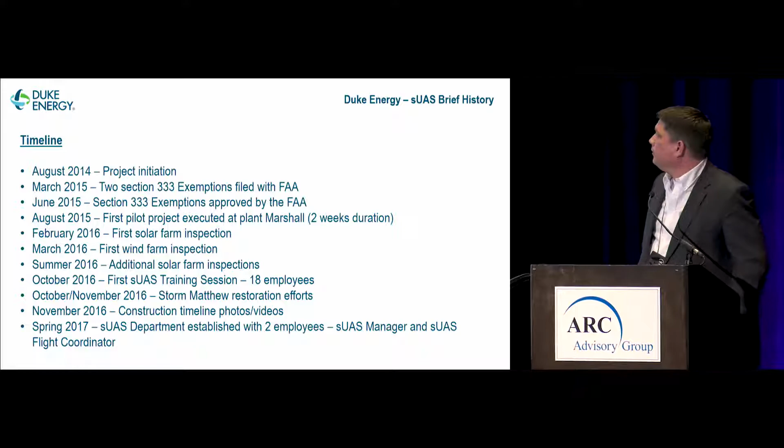So we started working in August 2014. We received our first two Section 333 exemptions in March of 2015, June of 2015, and we did our first pilot about 2 weeks later at a coal plant. Coal plants are great, or any kind of generation facility is great, because you usually have generation equipment, you have transmission equipment, some distribution, and in our case, we actually had renewable. We had a solar farm there also. And so we did the steps through. We ended up doing a wind farm.

And then in October of 2016, we went through our small unmanned aerial systems training. After Part 107 came out, we actually decided to train our own internal employees to this. We'd been hiring it out to outside companies. And what we found was that our own internal employees really wanted to be able to do this themselves and have the platform to be able to go, as Kurt said, at a moment's notice and do what needs to be done. We did our first storm restoration in October, November of 2016 with Hurricane Matthew.

And then we actually have created a new department at Duke. So my group is the Emerging Technology Group. We take these technologies and evaluate and pilot them, and then we roll them out to a business unit. In this case, unmanned aerial systems were wanted by all the business units: generation, distribution, transmission, commercial renewables. And so the best place for us to put them was under our aviation department. So our aviation department created two new positions, and they hired a manager and a flight coordinator to be able to do all of our UAS flights.

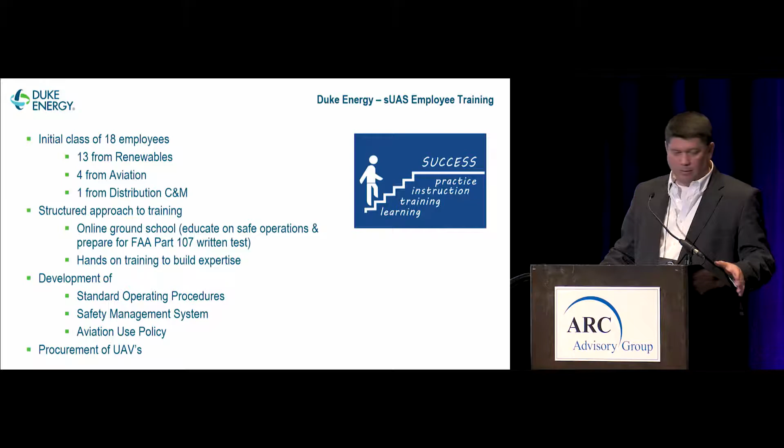The new manager of UAS as well as the coordinator have built a really good program around these unmanned aerial systems for Duke. They've created standard operating procedures, a safety management system, the aviation use policy. So even though we have our own pilots and our own platforms, we still have contracts with third-party vendors. And those contracts have to be vetted through our risk department. So they've put together all these different contracts as well as procurement language when we go out to buy UAVs. I want to really give a great shout out to those two guys who've been working themselves to death.

The ground school, again, we teamed up with the Unmanned Safety Institute and went with an online self-paced training through multiple different factors, airworthiness, human factors, and then of course you've got to know the rules, especially what's going on with Part 107. And then for the in-field training, we went out and actually let them fly the different platforms that we use.

On the right hand picture, if you could start a video just while I talk.

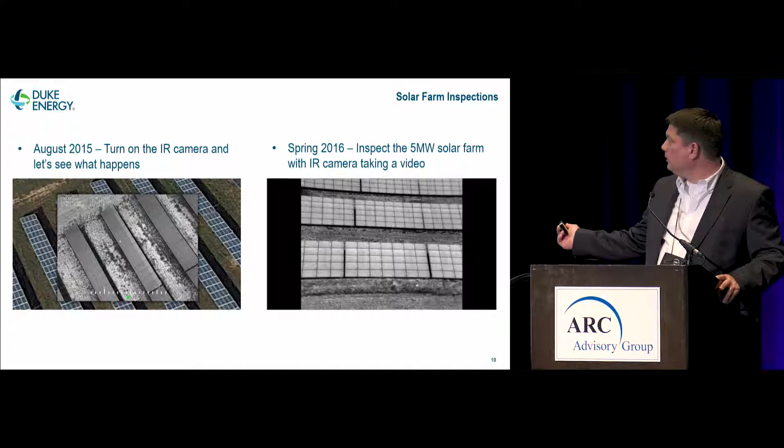So what really turned us to think about these as more of an operational tool is the fact that, we're in 6 different states, but North Carolina is the second fastest solar growth state in the United States.

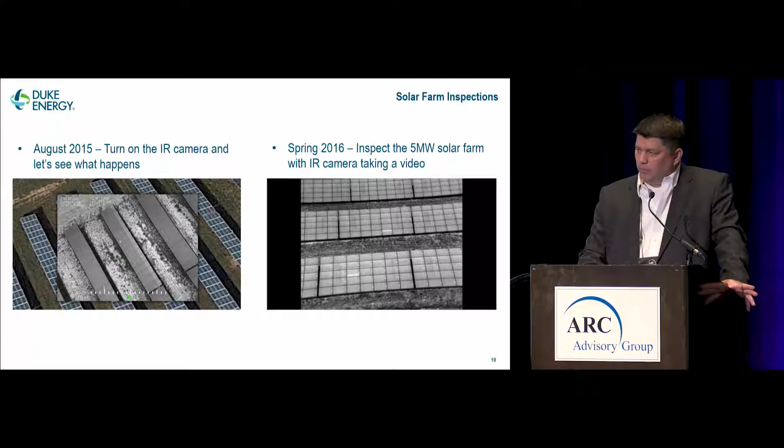And so we are looking at and managing a tremendous amount of solar. And in the past, what we've been doing to inspect is we'd be walking 5 megawatt solar fields and going and looking at thousands of panels and connections and seeing if we could find problems there, checking voltages every so often. Well, what we found was as soon as you put an infrared camera on a drone, what used to take 3 days takes about 2 hours.

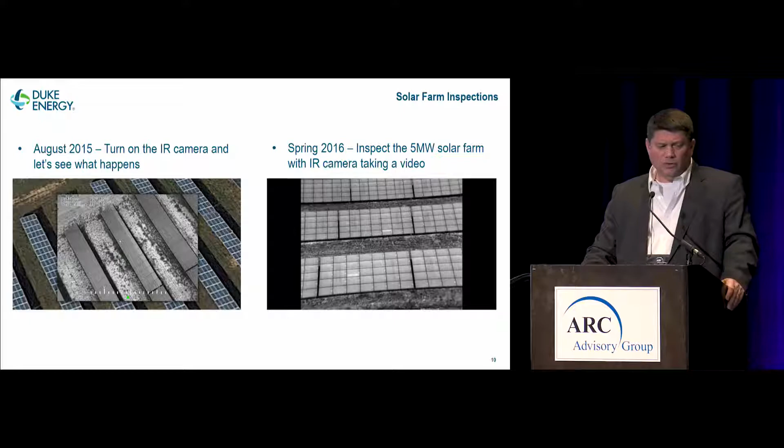So there's operational efficiency there. There's also a safety aspect there because now you don't have people walking around with overhead objects like solar panels that they could potentially hit their heads on, or slips, trips, and falls. So we really started in the spring of 2016 looking at using IR to do a lot of these inspections.

This makes a big difference when you go to farms that are 32 megawatts, 85 megawatts, hundreds of thousands of panels, and the time it would take you to go out and actually walk this. So we're seeing a tremendous operational impact from being able to do this with this type of drone UAS technology.

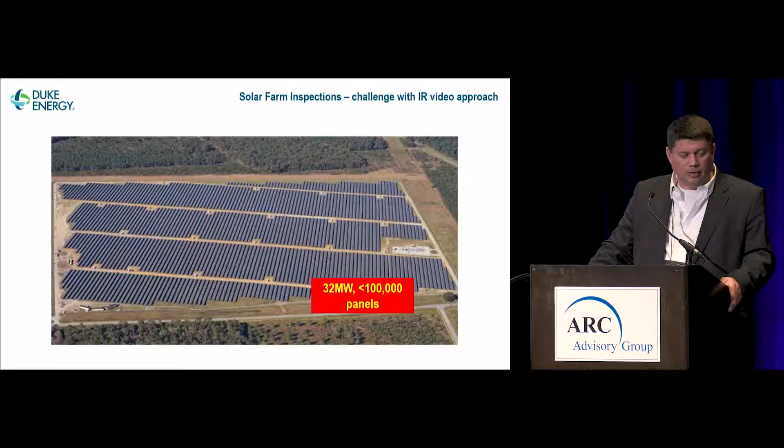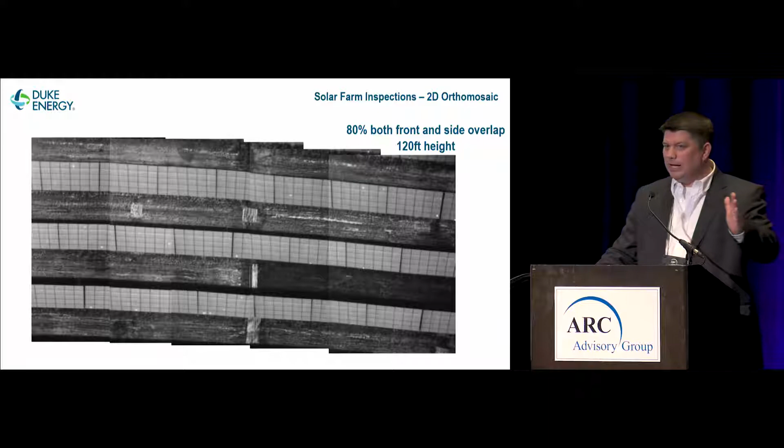One of the challenges that you run into, though, is once you start mapping areas as big as that, you're going to find that in 2D orthomosaic, you're going to get lost, because if you're taking video, that's one thing, but if you're taking individual still pictures, you've got to piece them together. And there is no kind of bottom XY plot to really say this is where you are. And so we're having to do 80% overlap on both the front and the side at about 120-foot height to really understand where I'm at in that solar field as I move along.

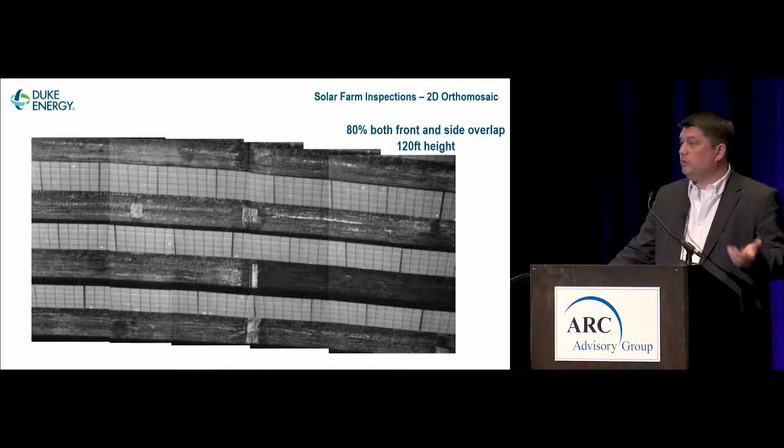And I didn't point this out on the video or in this picture, but you can see failed cells by the light color. They look white. So if you see white patches, those are hot patches, all right? So they're not actually generating any electricity. So you could see whether it may be a cell, whether it may be a string, or you could have an entire section out where you might have to go look and see if the inverter's even online.

We use a really good mapping program called Pix4D, and it is great, and I don't know if you can see it, but that is a complete string that's out. And then you have a couple of cells that are out over here. But again, it's really the mapping of the video that's been taken and getting it into a program that you can actually make sense out of the video and make work orders at the end to go fix those issues.

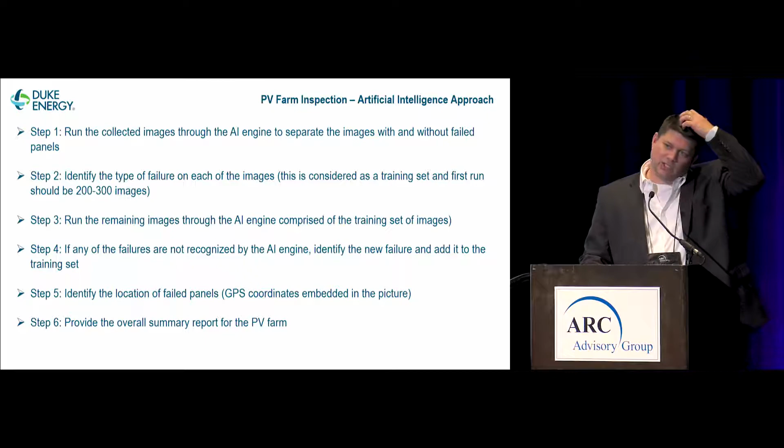So where we're headed, though, is doing it with artificial intelligence. So there's some new AI chips being made by Intel and others that are going on these types of platforms. And what we're really wanting to do is go through these different steps. As you go through, you collect the images, and then you want to see some that have failed and some good panels. You're going to identify those types of panels, and then you're going to run it again. And it's somewhere between 200 and 300 images to train the platform on what it's looking for.

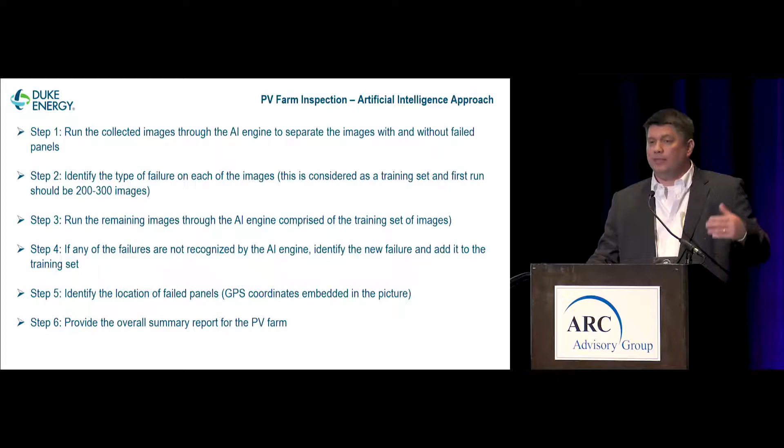And then you actually run it. You put the platform up in the air, and you go through and see if you can identify it. And then any failures that are not recognized become a new add to the training set. And so we're starting to work on that now with this program, and these 2 pictures are nothing more than our first attempts to start using a little bit of artificial intelligence to tell us where it thinks failed panels are. So we're not there yet.

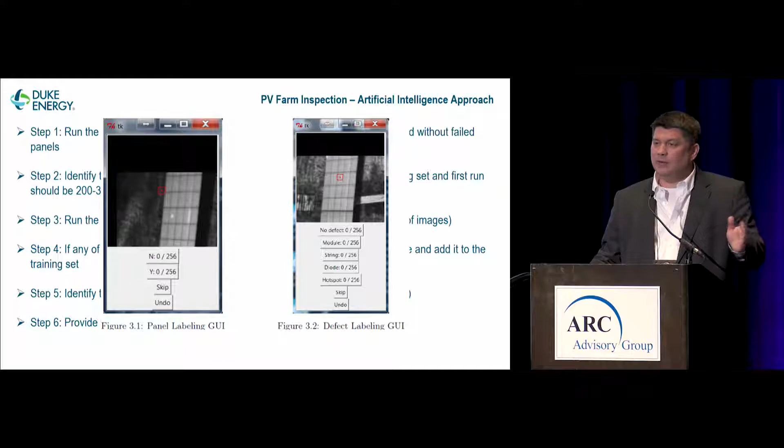This is not a commercialized, proven commodity for us, but it is where we want to go because we spend a tremendous amount of time looking at video. It's still a lot less time than we did when we were patrolling and inspecting by hand or by foot. But if we can make this work with the artificial intelligence to actually see where this is failing, recognize it, and create the work order, it's going to be a lot better for us as we go forward.

So wind turbine inspections are done on a normal basis for us. We used to do them by rope access, which is, I'm not going to say the safest thing in the world, ground inspections with high-powered telescopes, or a remotely controlled robot. We're talking specifically about UASs now, but we have a lot of different crawler robots.

We have underwater UAVs that we can use to inspect our dams, inlets and outtakes from our generation stations where we suck water in. And then we also have some military-grade drones that we use inside our nuclear plants to get into high contamination radiation areas that we don't really want humans to go very often, that are all remotely controlled.

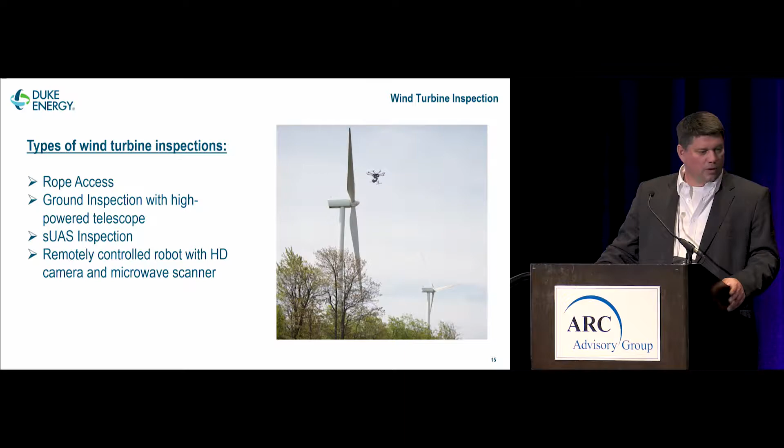But we found a lot of good uses for them, especially with wind. So you can see cracked blades, where you're starting to see cracks in blades, and then just bird strike damage, or, I'm not sure, that looks more like a lightning strike damage to me than bird strike. But it's good to be able to have this type of platform.

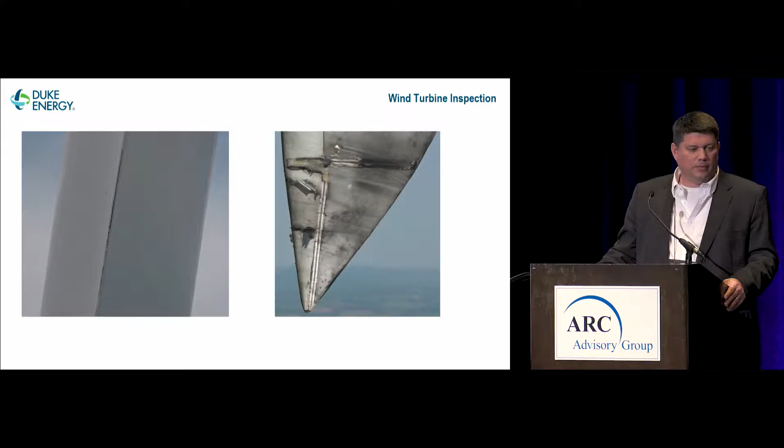You know, what Kurt talked about with looking at the gravel, we do the same thing with coal. So we go out and measure our coal piles. Even though our coal piles are shrinking because we're shutting down coal for the most part as a generation source, we still have it today. And so we look at it to see when is that next trainload of coal going to be needed, and can I better utilize my supply chain by knowing what my limits are, because I'm mandated to have an X amount of day supply in case there are disruptions.

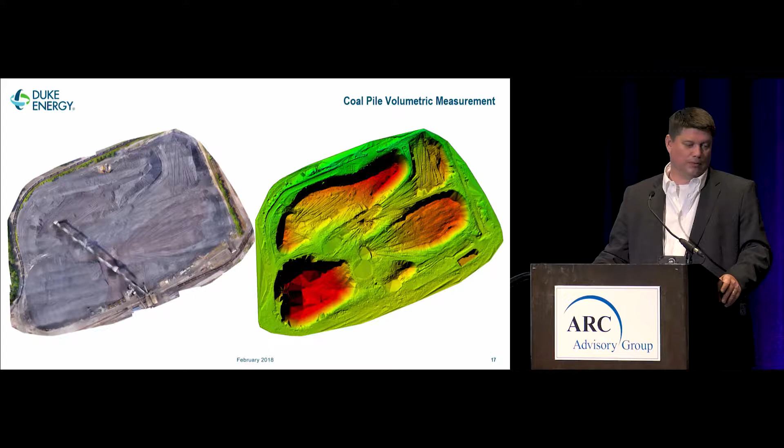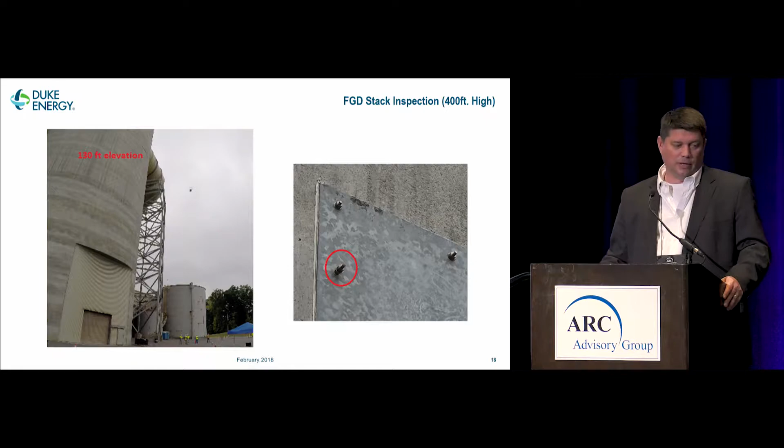So we use some volumetric measurements with the drone to go out and really look at these different coal piles. We use them a lot for flue gas, FGD stack inspections, where we can go up and see things as small as a bolt that's becoming unhinged, and that's at a 400-foot height on some of our larger FGD stacks. And just places that you just don't want to put people. You don't want to either build scaffolding, or put people on the outside of those types of situations. And again, trying to do that from the ground with a high-power telescope, maybe you can, maybe you can't.

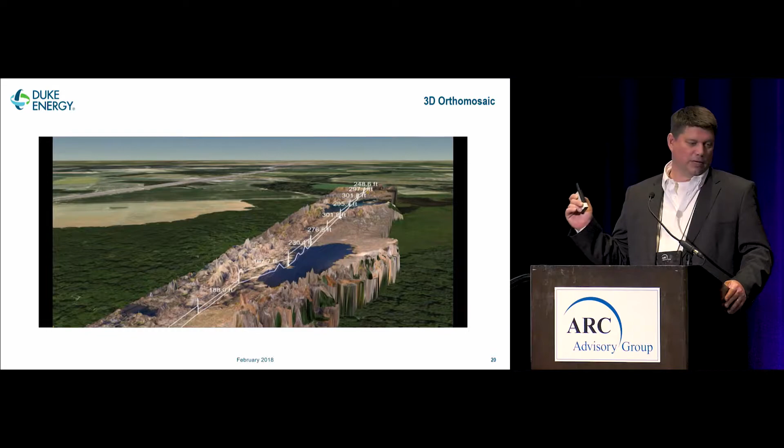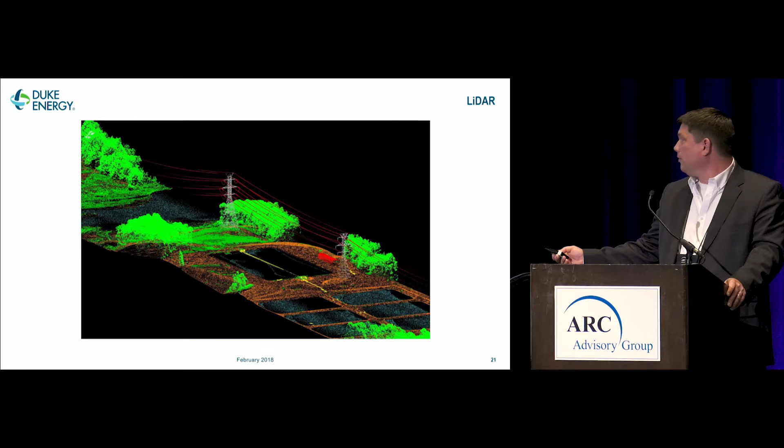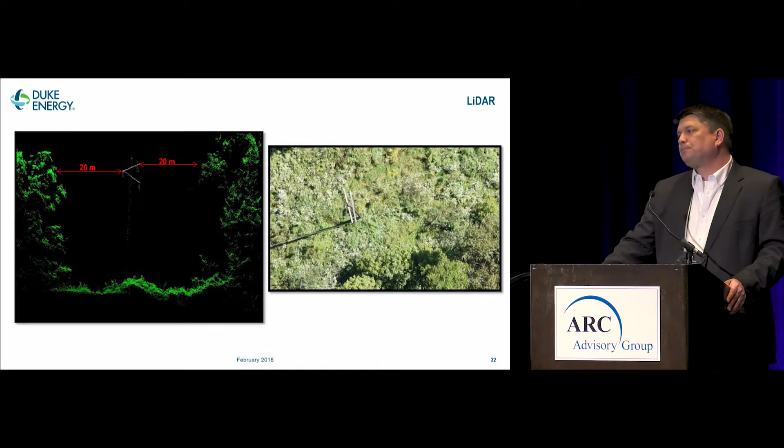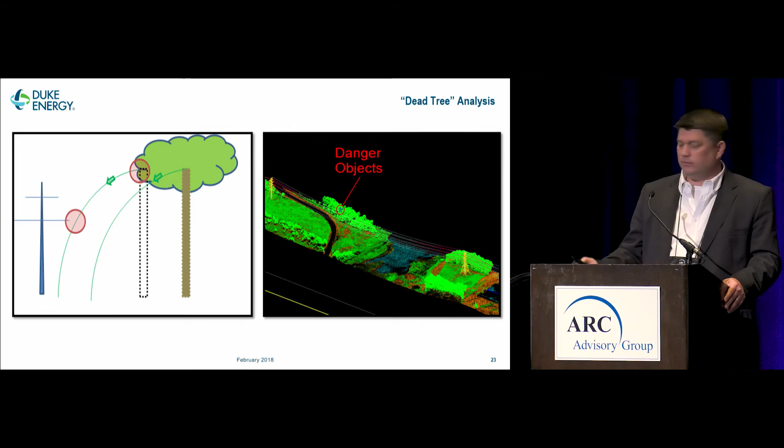And why we're looking at that is because of the danger objects that potentially can fall in. So you see here that we've identified a danger tree that could be dead. It could just be too tall. We're not exactly sure yet. More than likely it's dead because of the different coloration, and that danger tree could actually fall into our line, so we proactively can go out and take that down before it has a chance to get into our lines. So I went through that relatively quickly because I wanted to make sure there was time for questions and answers,